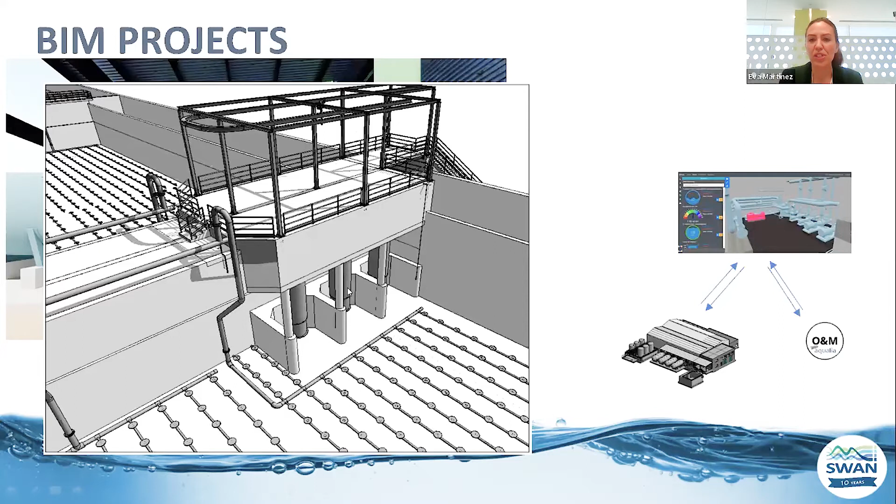This is about the project Run4Life, a new business model towards a real water smart society. So the idea here is to apply nutrient recovery at the source, increasing recuperation rates by treating concentrated streams. The nutrients produced, fertilizers, and reclaimed water are analyzed for being reused in agriculture, industry, and toilets. This scope allows decentralization using different reactors or technologies implemented at neighborhoods or communities, increasing resilience.

With this approach, we get rid of the conventional, centralized, and linear approach that only recovers a small fraction of diluted nutrients. Highly diluted municipal water does not have to be pumped miles away to the treatment plants. Nowadays, we know that municipal wastewater treatment plants remove from 80 to 90% of the phosphorus and more than 70% of the nitrogen to fulfill the discharge limits at a considerable expense. This model is an attractive alternative where centralized systems do not exist, the existing sewerage is old or leaky, or existing wastewater treatment plants are overloaded.

These new models need digital tools, not only to monitor and to simulate the process and control a large number of spread plants, but also to increase stakeholder engagement through different channels, apps, webs, to increase their knowledge on the process and to make them also feel that they are responsible for becoming part of the solution, supporting the participation of local communities in improving the water and sanitation management.

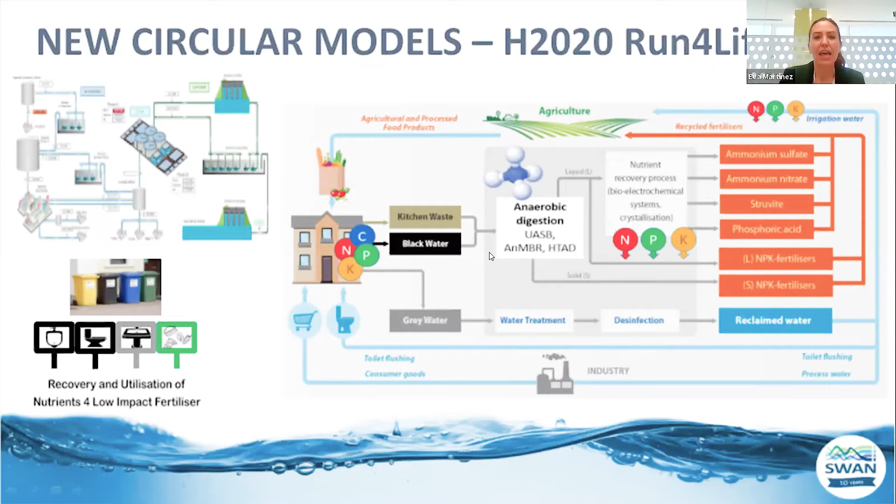So then, following with people and communities, I would tackle the smart cities, where the ultimate objective is to improve the citizens' quality of life. The best example, or the one I like the best, is Santander, that has been working towards the concept of a smart city for many years already, and where the city is equipped with more than 20,000 sensors. These are distributed throughout the city to measure environment, parking, lighting, and so on.

Regarding the water, the Smart Water project started more than 2 years ago with the partitioning of the water network, modeling, use of flow sensors and pressure valves, adjusting the pressure of the network to real water consumption, monitoring of water quality, and decreasing leakage rate, leading to savings of water and energy. We've saved around 30% in energy and 23% in water losses compared to previous years.

Additionally, I would like to remark the efforts to communicate with the customers using different channels. Aqualia's app for citizens graphically shows consumption over a time range, with the possibility of comparison with yourself on different dates or with others of the same category, and to report incidences. There are also panels giving information about the flow and quality of the water, increasing visibility of the water.

The evolution of communication technologies means that management can be closer to the citizen. Companies can offer new and enhanced services to citizens, such as communications, warnings about municipal consumption, and recommendations for responsible consumption.

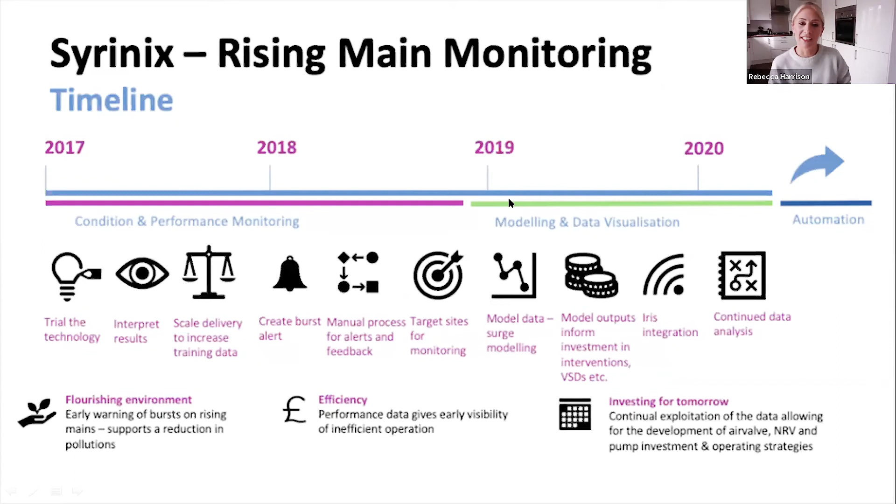So what does it actually look like? So this is one of the extracts from the system that we use, which just shows the type of data that we're getting through. So you can see in this instance, we have 2 pumps performing fairly well, and then one's performance reduces, and then both start to underperform, and the static head goes completely.

Not all bursts look the same, so different material types and the different profiles of rising mains will have different pressures overall, but we were able to start identifying what the standard shape of a burst looks like, to the point that we have about an 80% confidence now that when the system identifies a burst, we are confident that we should go out and attend, and that we are in the burst state, which is really fantastic news.

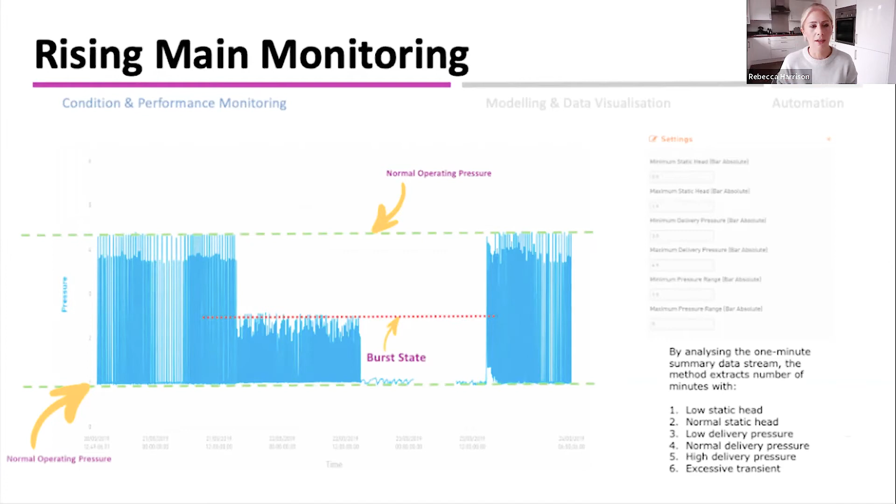The system also allows our analysts to interact with it and manage those set points, so that when we do get some erroneous results, we can start to really break down that and start to put in some manual or human learning to improve the modelling overall. If we go on to the next slide.

What it's also allowed for is for taking out additional data sets. So where this was initially intended to help us identify failure, we were also able to start picking out some of those performance parameters, which are especially good when we start looking at the efficiency of assets. So our pump stations, we have, as I say, over 6,000 pump stations with much more than 15,000 pumps. So their performance is important because they are big energy consumers.

So we can start to look at matching the pumps and starting to realise when they're underperforming and actually start doing some diagnostics. So with this particular report, we can start to see when we've either got the hydraulics failing or when we've got non-return valves that are ineffective. And it means that we can distribute work, we can understand what the payback period is, we can understand when we should attend, and it allows us to better manage that asset group. If we move on to the next one.

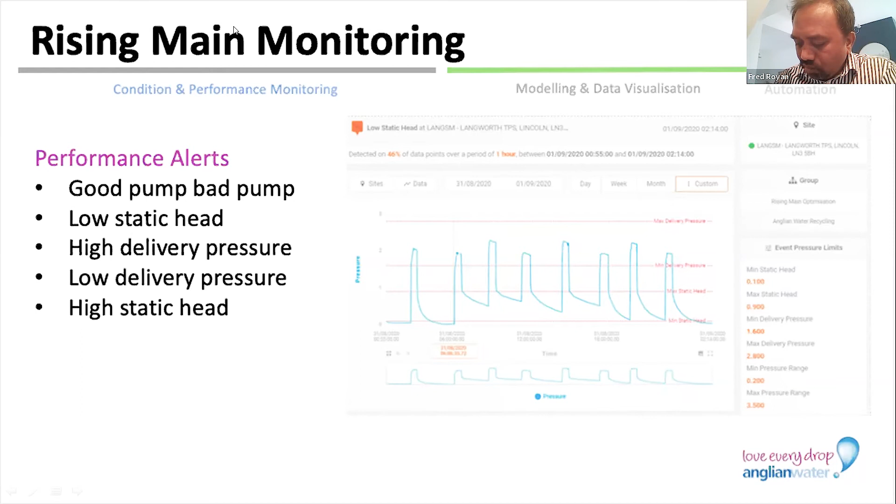So the condition and performance monitoring bit we've got quite nicely. We've had it for 2-3 years now and have really started to mature. We then moved into this modelling world. So we started to use surge modelling to really understand what the pressure profile was actually doing to the condition of the rising main itself. And using that tool, we were able to start putting in interventions in the sort of virtual world to understand how to best intervene in the real world.

So we were able to look at things like air valves. And air valves, notoriously, there are many, they get hit, they have problems, and you can't always distinguish the value of repairing, maintaining, or replacing. And this gave us a really great tool to start to develop our air valve replacement strategy, which has been really effective. So we were able to look at exactly the value, not only to the condition of the asset and its life, but also to the operating efficiency. So off the back of that, we developed and have started to deploy a new air valve strategy.

It also allowed us to look at things like VSDs and the use of those to reduce wear on the asset, but again, also to generate a degree of energy efficiency. So as a result of that, a number of the rising mains that we would have initially planned to refurbish or repair, instead we've been able to put in either different pump types or better air valves, which has not only reduced the operating cost of the asset, but has actually prolonged the life.

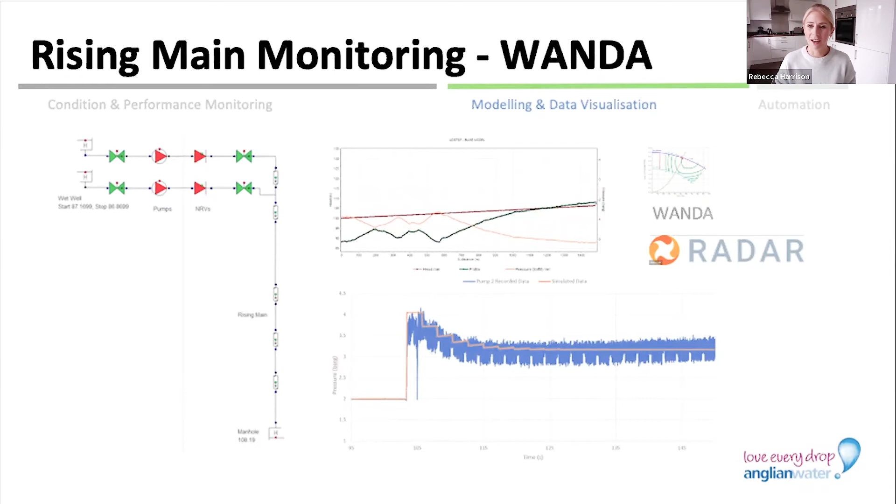And we started doing this about 2 years ago, and one particular asset that we have in mind would burst between 6 and 8 times per year. Since having put that in, it hasn't burst at all. And that was a 3-yearly profile. So nothing other than those interventions have been put in place, which speaks to the benefit of understanding exactly the operating parameters of the asset and how you can start to approach them slightly differently. If we go on to the next slide.

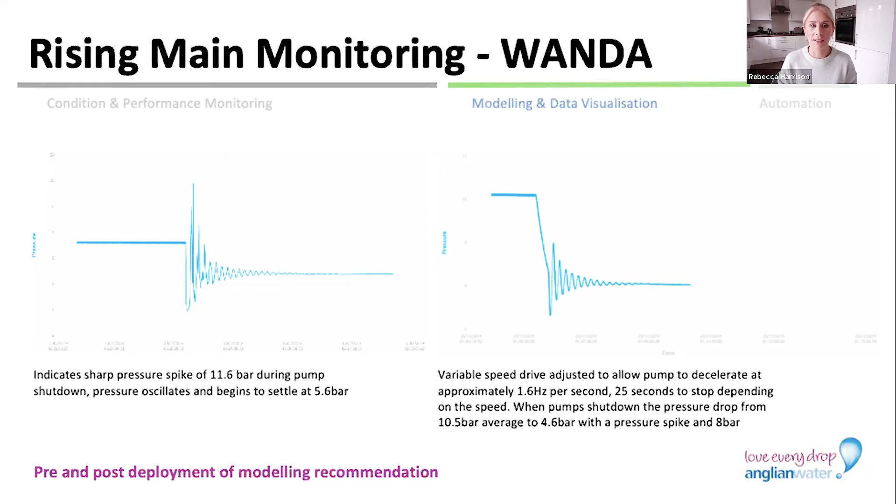And then the final element, the bit that we hadn't planned to do for at least another year, until we've done some more learning, but that the current pandemic necessitated, was the automation of assets.

And as I say, this is to do with, if we have a burst, we know that our pumps will continue to pump and then pump into the environment. And what this has allowed us to do is see the burst state and stop our pumps pumping, therefore containing any impact within the wet well, allowing us to get out to site with tankers or other mitigation to prevent any environmental consequence, which is really fantastic.

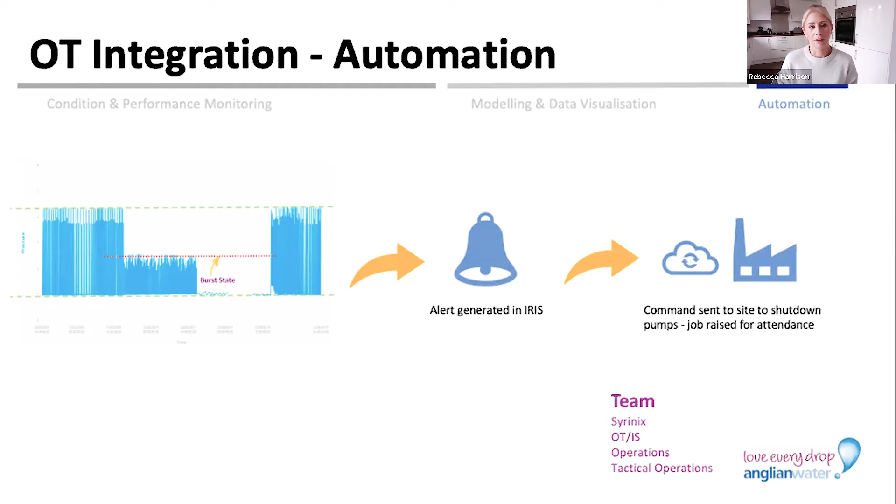And if we go on to the next slide, it just goes to show some of the architecture we were able to deliver quite quickly. So this particular solution goes to a third-party platform and then comes into what is our OT platform, which is an Azure type platform that interfaces with our existing telemetry system, which is IRIS. So that allows us to take really high resolution, high frequency data, put it into a more effective data storage world, and then push out responses into our IRIS, which is our eyes and ears. It's what we respond to, it's what generates our alerts for operational technicians.

And then what we've been able to do subsequently is open IRIS up to speak directly down to the site. So IRIS can now drive commands down as a result of the data found elsewhere. So this is a capability we've not had previously, but which opens up a lot of opportunity for us, not only from resets and other things, but weather-related control, all those sorts of factors that we haven't had previously. So it's a really good opportunity for us to start doing some much more intelligent remote management to, again, effectively utilise the resources we have on the ground.

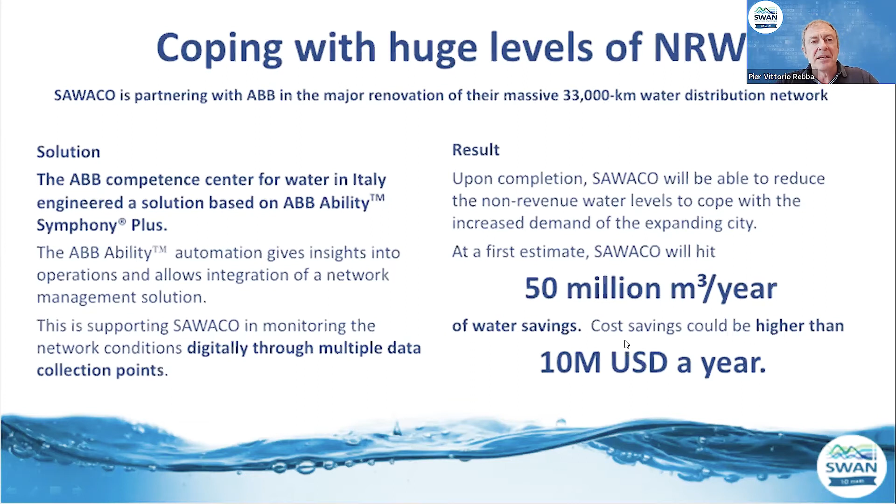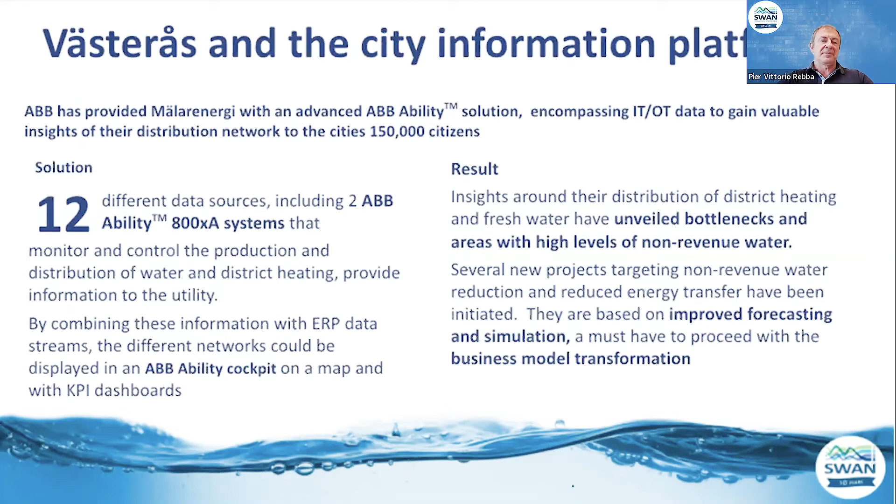The idea here is for Mälarenergi to create new high-value digital services. And all this system is cloud-based, so we can deploy the system from the site to the edge to the cloud, even intercloud. So for us, it's not a problem. But in this case, the selected solution was fully cloud-based. And the target, of course, is increasing efficiency, reducing cost, and optimizing the operation there. Okay, next, please.

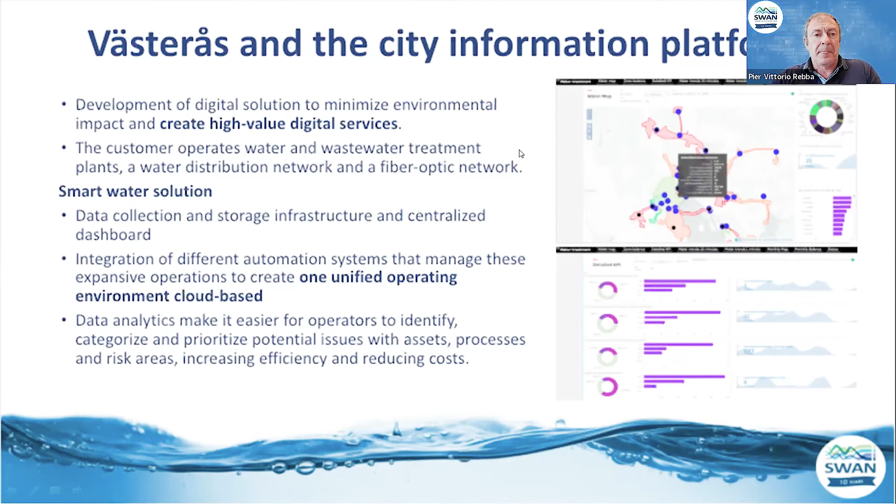Okay, this is the overall solution that we think is probably one of the most important ideas beneath these projects. So the idea is not just to tackle one aspect of the problem, to have a system for predictive maintenance, a solution for energy optimization and process optimization, another one for leakage detection, and so on, but really to make all of these systems capable to interact and work together in one single cockpit view that can manage all the underlying systems.

We are also testing AI knowledge assistants that can interact like we have at home, maybe with the Google Home, or maybe other systems.

You can really talk to the system and have a conversation with AI on the best solutions. So this is not yet product, but we are running pilot on this, and this is another way to help operators in optimizing and taking decisions.

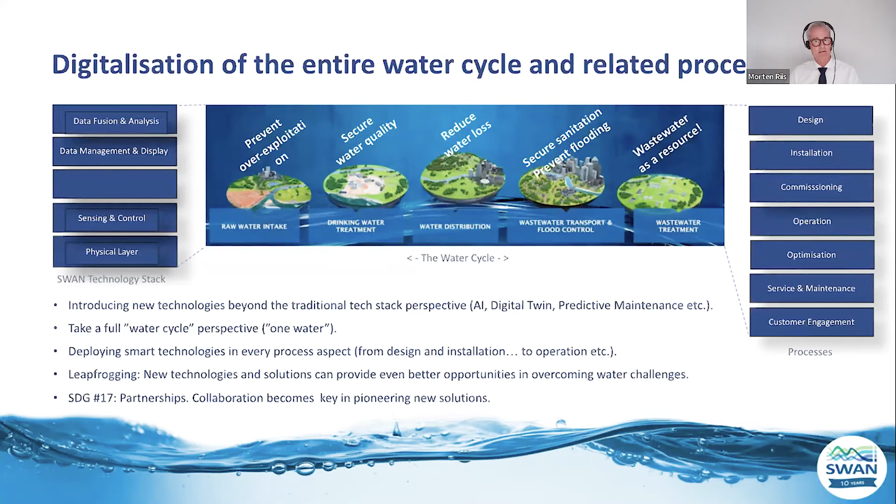And here, Grundfos Machine Health supports predictive maintenance in order to prevent downtime, as well as secure a longer life cycle of the equipment. So indeed, a smart approach to our entire set of processes will definitely optimize your water business. So maybe just a short reflection back to the Sustainable Development Goals, where SDG 17 is actually about partnerships. And in Grundfos, we see partnership as a right and much faster way forward. Next slide, please.

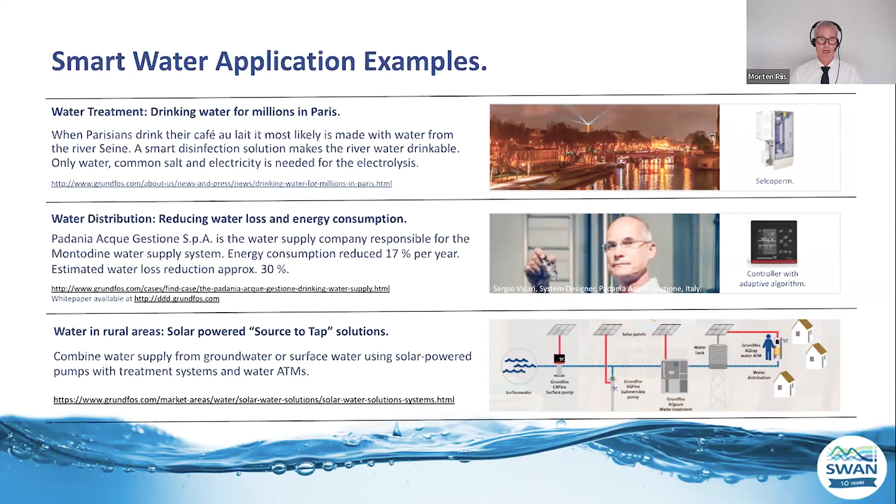And I just want to stress here at the end, the latter two examples are actually developed and produced in cooperation with great Indian colleagues, ready also, of course, to serve the Indian market further with these solutions. So Jen, if you turn to the final slide, I'll just end by saying there's definitely a need to continue pioneering water solutions. And I'm proud to have 19,000 colleagues around the world to support our way forward. And we will be ready for the next 75 years as well and onwards.

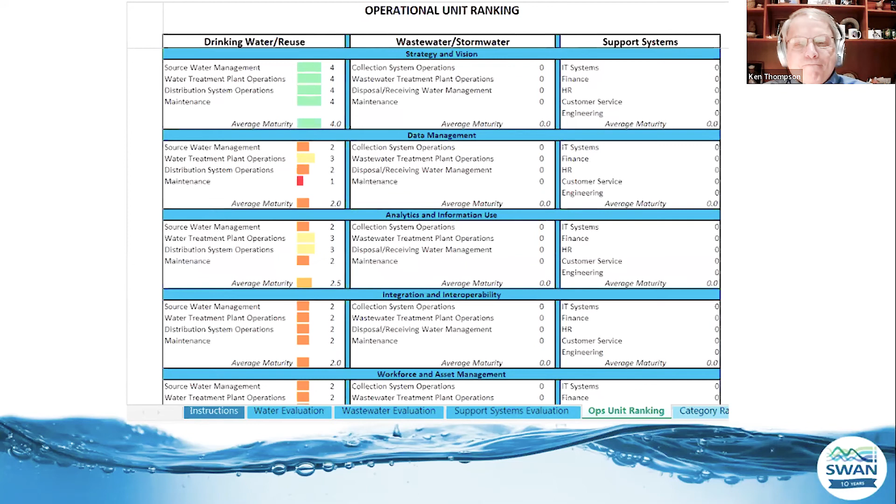We've talked to the largest water and wastewater utilities in North America and asked the chief information officers 2 questions. Can you process big data in real time? And only 13% of the largest, most sophisticated water agencies felt that they could do that, because again, it has not been part of their focus in the past.

Then we asked them the other question: of all the data you collect, and trust me, I came from a utility background for 20 years, we're really good at collecting data, how much of that do you actually utilize? And they said about 10%. So there's all this dark data that's sitting in there, being collected and not really providing value for the organization.

So we always think about the value of now, that certain information whose value decays exponentially over time. You need to perform real-time analytics on data, provide real-time intelligence. Example, if you have a pipeline break and you can detect that break when it's first starting to seep, as opposed to when it actually bursts and you have water gushing out of the ground, your cost of maintenance, your cost of impact on your customers is going to be significantly less.

So an example is in New York City, where they had customer complaints, and they had a major water quality problem in the organization, and unfortunately the digitization isn't working here. But what they did over a 2-week period, they were able to capture the customer calls and find out where that water was in the distribution system, and actually go there and do focused flushing.

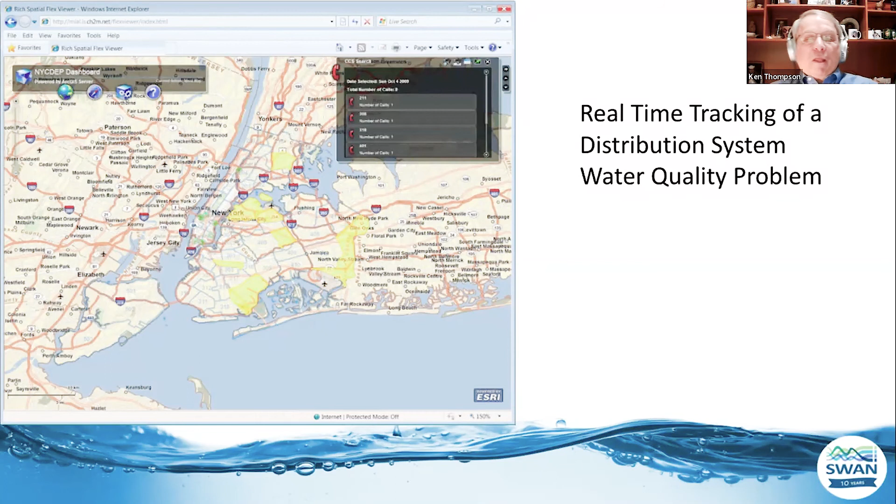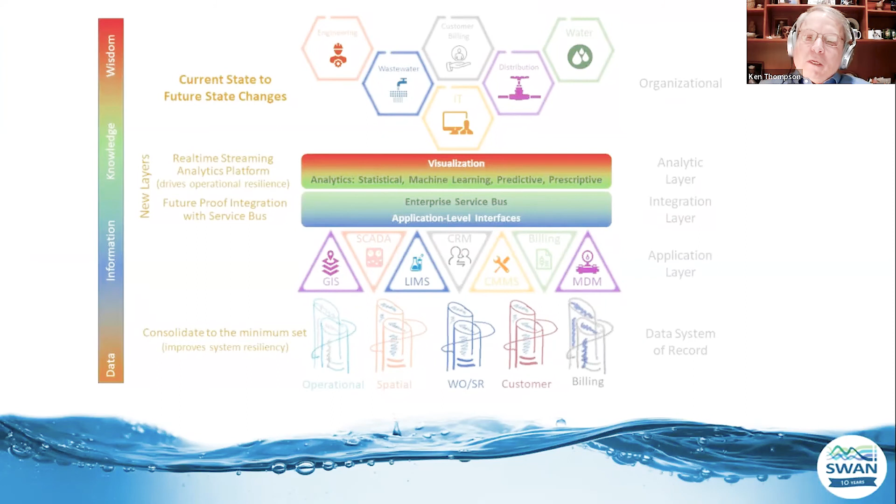Next slide. So some closing thoughts: the digital transformation journey is a complex process, and this could require proper planning. I would say, don't jump in and just buy a bunch of technology because it looks cool. Make sure that it fits in your overall program. Creating that strategic plan really provides a focus on how and when you implement different types of solutions.

It's really critical for the utilities to understand the organizational strengths and the organizational weaknesses, so as they start to put their digital transformation in place, they can actually achieve those goals and strengthen the weak areas. And last of all, assessing the digital maturity of a utility really provides the roadmap to go through your digital transformation process. Jen, back to you.

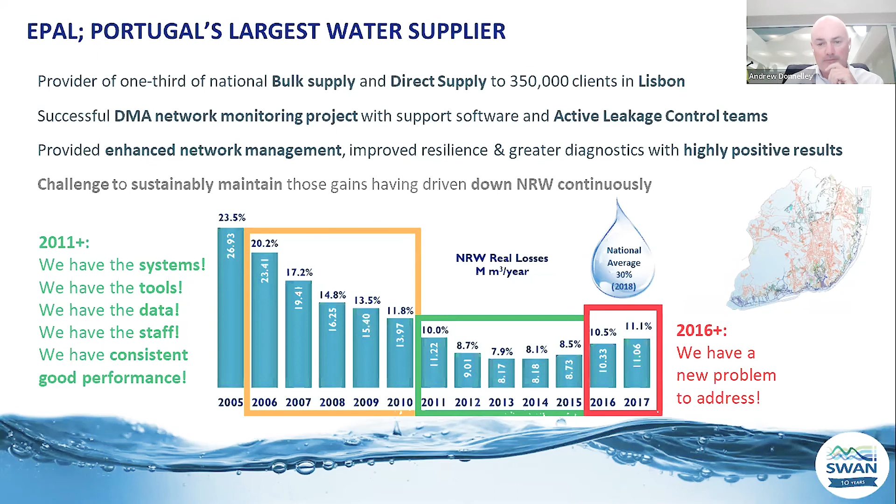So the problem was identified in 2 supply zones. The city has 5 supply zones; we are specifically in 2 supply zones. And these are about 150 kilometers of large diameter mains, 400, 500 millimeter diameter mains up to 1,500 millimeters. And they're outside of the permanently monitored DMAs. So the monitoring and the metering that we have on these larger mains is not sufficiently accurate to permit the identification of leaks or assess the leakage potential on them.

So what we did was, having eliminated 95% of the network, we started using the existing infrastructure and the existing data to try and pinpoint more accurately where we thought the big leaks were. So we did a new assessment method using temporary segmentation of these large diameter mains, where we used the DMA meters and telemetry to actually monitor these large diameter mains. We interconnected 2 or 3 more DMAs, and we fed back the DMA meters onto the trunk mains.

The objective, the output, was to identify critical sections for specialist leak detection interventions. And these are, as I said, large diameter mains up to 1,500 millimeters. The company doesn't have equipment to work under these conditions, and contracting service provision for leak detection on these mains is expensive. It's time consuming, it involves a lot of preparation, and it can also be very demanding in terms of network operations. So obviously we wanted to really pinpoint which were the sections that we had to do this on, and that's exactly what we achieved. If you can go to the next slide.

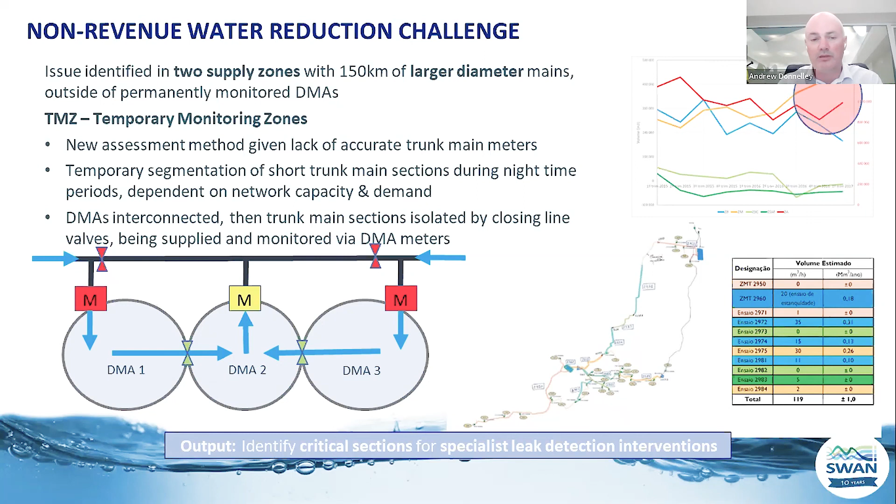So on the smaller mains we used standard leak detection methods; up to about 400 millimeters we could do ourselves. And then what was contracted was a Sahara campaign with 11 surveys over 10.5 kilometers of mains. We found 26 leaks there. And a SmartBall trial, the first time they've used the SmartBall system, just with 1 survey on a section of 500, 600 millimeter main, and we found 11 leaks there. The results were quite dramatic.

Sahara repairs were completed earlier this year. You will note that it took 3 years to complete all those repairs. This was, at some locations, quite a concern for us, because we knew the sensitivity of where the leaks were and if there was a burst at those locations. But we don't control when and where we can do the repairs. We're at the mercy of the city council and the police to authorize those repairs. So that's why it took so long.

SmartBall required other leak detection techniques to help us actually pinpoint the location for those. But again, successful repairs were done there. The non-revenue water in those 2 supply zones was reduced by 20 and 45%. That's around 2 million cubic meters per year.

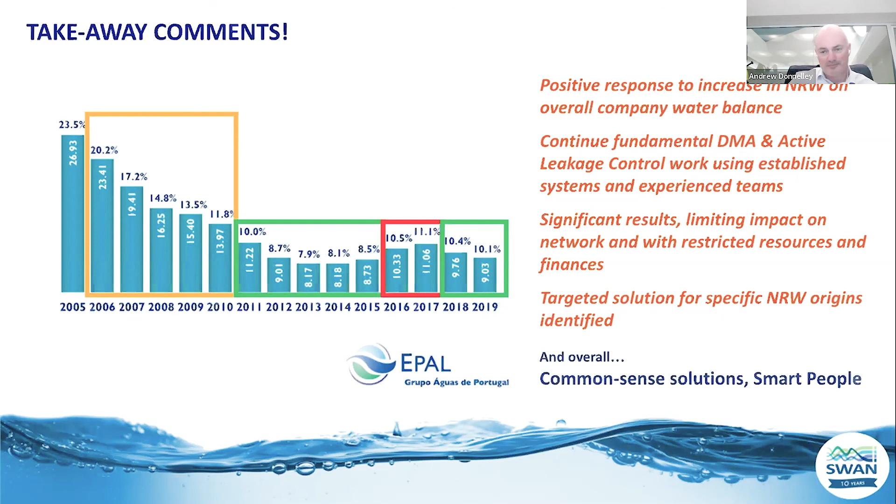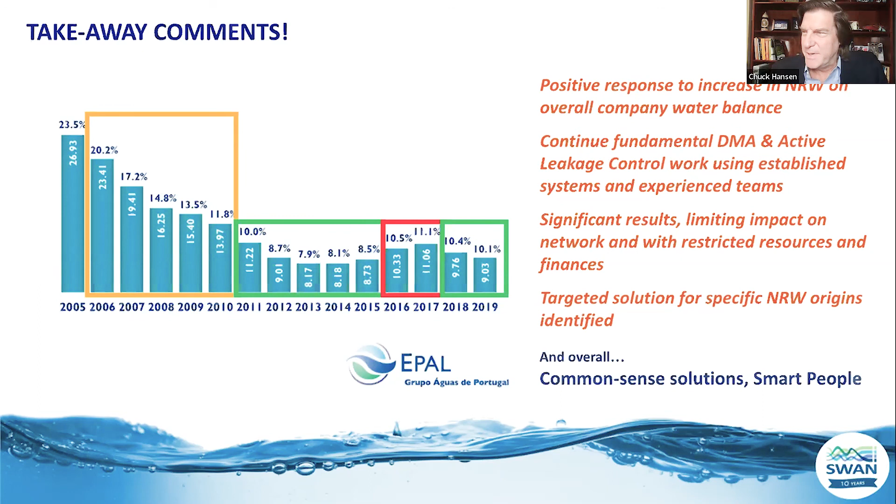Great. Thanks, Andrew. Andrew, I've got a question before we go on. I noticed in one of your slides that you investigated 10.5 kilometers of pipe, but only came up with something like 26 leaks. And you do a back of the envelope check on that, based on the number of joints. Since I went to Berkeley as an undergrad, I look at those things. It seems like the pipes were near perfect. Could you give the audience a little bit more information on the leaks, and when you found and fixed them, what did you find on those 26 leaks?

It's a good and a pertinent question as well. The size of mains that we're working on, each section, the concrete mains are 4 meters long. So you are talking hundreds, literally thousands of joints between those sections. And you can have 99.9% of them functioning perfectly with no leaks. But if that 0.1% is in a sensitive location, and you're risking a big leak or a burst or having the road surface undermined, leakage into a third party property, then you're at big risk.

The majority of the mains that we did with the Sahara campaign were laid under the main freeways, dual carriageways, the main roads that cross through the city of Lisbon. The potential consequences of an unplanned burst in one of those locations were considerable. Hence, it wasn't just an initiative to reduce the non-revenue water headline value percentage or cubic meters. It was a risk avoidance strategy to make sure that we could proactively control when and where those repairs were done, to avoid major disruption within the city. So it was about risk control as well as non-revenue water control.